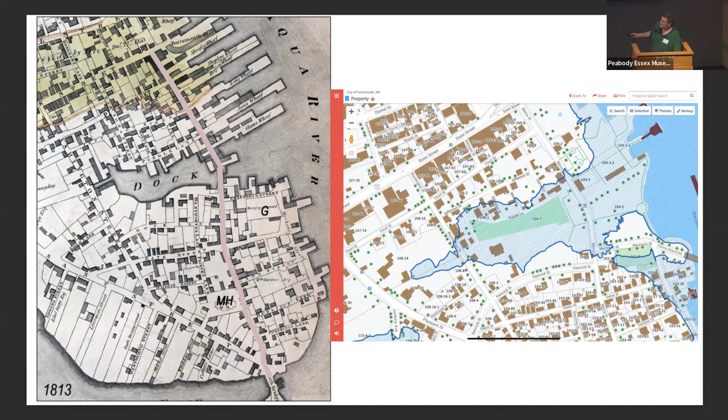The best evidence of that is the city's flood projections. This is the FEMA flood projections over the city of Portsmouth map. You can see all of the buildings along that low green area, which was the dock, is the projected flooding. And interestingly enough, because water has a memory, it's basically trying to connect back to what is now the South Mill Pond, which is what it did historically back in the 1600s.

So groundwater is a little bit less known issue, and a lot of research is going on with it. These are some projections out of the hydro predictions that came out at a conference just in June. You can see in our particular area there's a lot of major concern about what the water is going to look like, especially right here, which is where Puddle Dock used to be, and what groundwater is going to do being influenced by the Piscataqua River.

We've been seeing this in our basements for certainly the last 3 decades. As long as I've been at Strawberry Banke, we've talked to people who used to live in the buildings back in the 50s, and they remember a damp smell to the basements. So I think this has been an increasing problem for decades, actually.

And this is kind of what happens: the groundwater perks up from underneath the large field, and then the rains fall from the sky, and there's no perking. The water has no place to go. So we have this huge lake that forms.

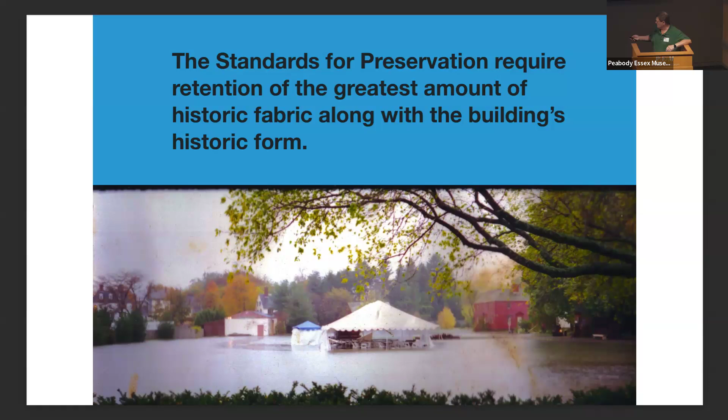My focus today is going to be on the Penhallow House. This is a 1758 structure that was actually moved to our campus in 1862. So we consider it our own, even though it was moved here. It's been there a long time.

Unfortunately, unbeknownst to them, they put it right on the creek that used to go from the Puddle Dock and lead to the South Mill Pond. So this building has been suffering from huge quantities of water and high relative humidity in the basement forever. We had to address how to take care of both the relative humidity and the issues associated with the standing water.

This just gives you a little background. This is the Penhallow House right here. Here's that 1813 map showing you the dock, and before, the water used to trickle right through and head back to the South Mill Pond. This is a modern map picture today of where the Penhallow House is. So this is some of the serious water we're dealing with.

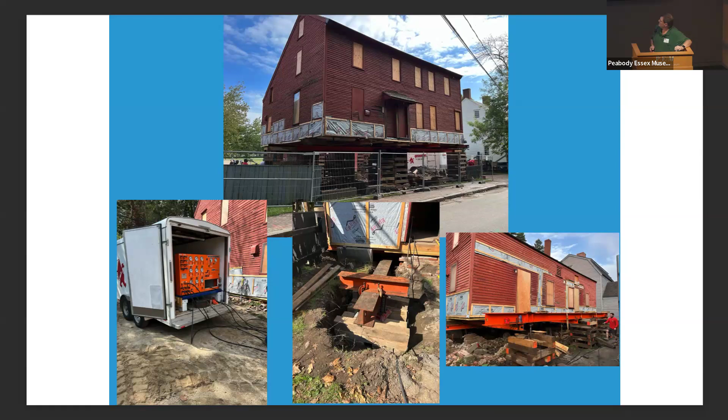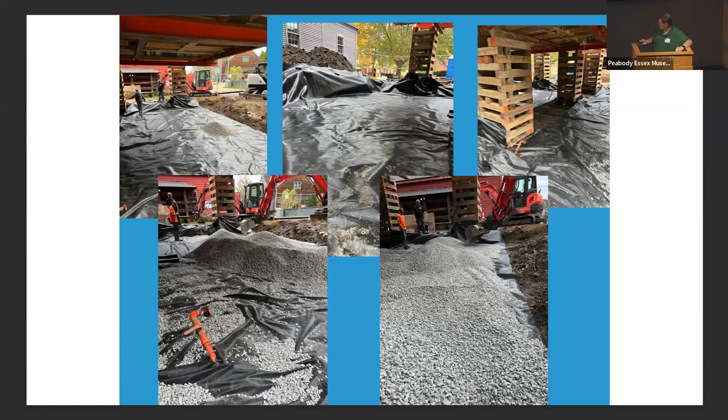These are some images showing you what we decided to do. We didn't want to change the context of the building in relationship to the streetscape — that's really central to what we're interpreting. So we decided to elevate the building, go underneath, and remove the existing foundation, putting in a very thick permeable membrane, which you can see in these images, covering it with eventually 3 to 3.5 feet of crushed rock against a new poured concrete foundation, which you can see in these images, both the forms going in and then the actual concrete that's been poured.

This allows us to create what's called a wet-proof basement. We're going to invite the water to come and go as it needs or wants to, with the idea that we have systems in place to get rid of the water when the Piscataqua River will take it. So our biggest challenge is that our drainage system connects to the Piscataqua River, and that's tidal.

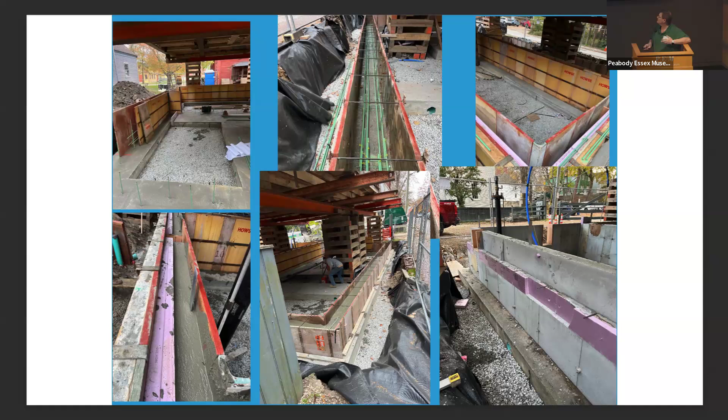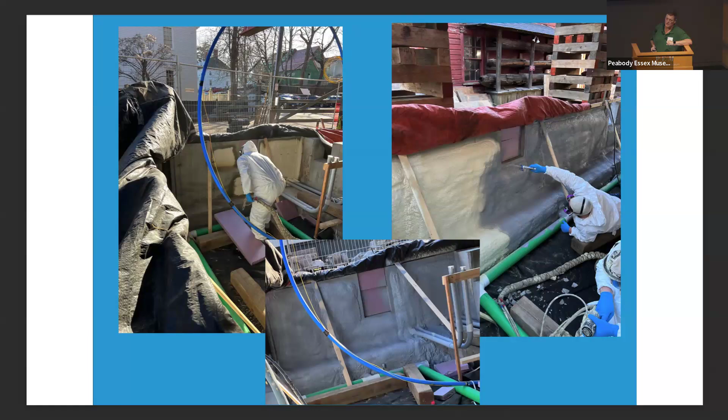It's an interesting process. These are images of the spray foam that we had to put onto the foundation, which is twofold: one, it's to help us with the humidity question that I brought up earlier, but also it has to be fire retardant because we're planning on putting residential apartments in half of the building. So we have to have a fire rating.

And this is the good news: that huge storm we had in January saw the highest recorded tide in the Piscataqua River ever. It filled up the basement above the crushed rock, as you can see, just as we had hoped. And then when that tide went out in 2.5 hours, it drained away. So this was our hope, that we would have enough space for that water to come and go, but not impact the undercarriage of the building.

We did put in some insurance, if you will. You can see these little pockets right here — there's actually 4 of them. Those are going to be flood vents. So if the water begins to creep up onto those joists or close to the joists, it's going to spill out behind the back of the house and go into some newly established rain gardens that I'll talk about.

And we also embedded a hard-piped sump pump in the center of the basement, which will go out on Washington Street at the front of the building. You can see it right there. And that's sort of a last-ditch effort. It'll be a battery-operated pump. If we need to pump it, we will, but that's hopefully never going to be needed.

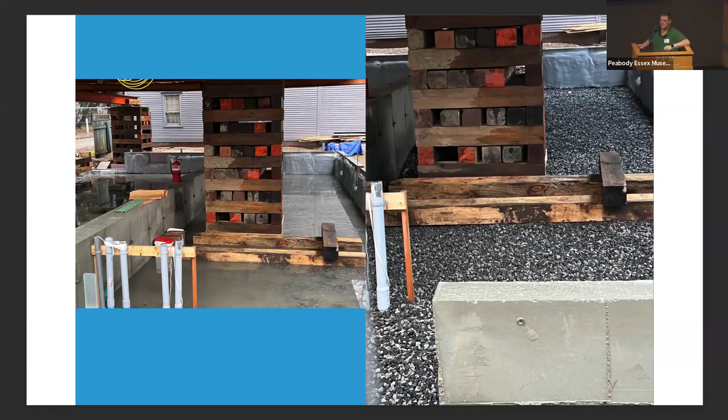Just to talk a little about the surface flooding, because this building is impacted by that as well.

In the spring, we're going to be implementing a mountable curb. Basically what's happening is the city stormwater is coming down both sides of Washington Street to this low point, and then it floods our property, which isn't something we should have to deal with. The city's our partner, they're going to help us with this, but we're going to put in a mountable curb, which will give us about 5 inches and cause the flooding to happen in the street as opposed to on our land. We're then going to be changing the elevation of our street, bringing it down 6 to 8 inches so that we have positive pitch away from the Walsh House, which is the historic house that's here, and Penhallow House.

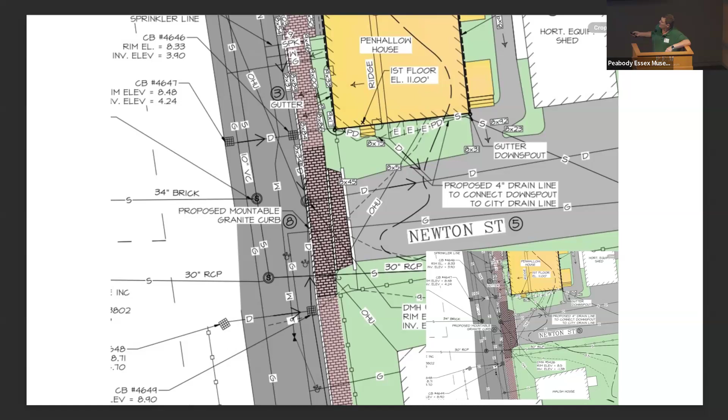That will go to some newly established water runoff areas and then bioretention areas both here and up on Whidden Place, because all the water comes down this way, and it used to come down this way. So we're going to break that water load in half. We're going to send half of it up to this area where there's an existing storm drain, and then we're going to send the other half to this newly created storm drain.

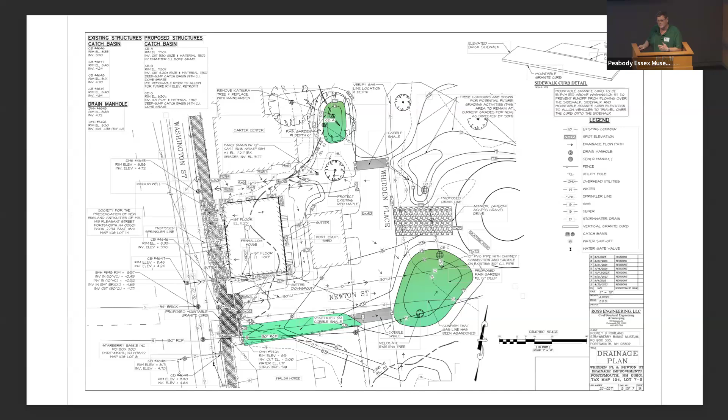And again, it's a waiting game. The water will stay there till the Piscataqua River tide goes out and the stormwater system begins to work again. So, that's my time. Thank you very much.

Oh, there they come. Nope, I see them, they're coming up.

Hi, I'm Julie Larry, and I'm an architectural historian, and I was formerly the Director of Advocacy for Greater Portland Landmarks, which is a regional nonprofit. While with Greater Portland Landmarks, we initiated a project to increase our understanding of the potential impact of increased flooding and storm surges on our region's historic resources, and to determine what strategies could be taken to prevent or mitigate those impacts.

In particular, our concerns are with two communities currently experiencing flooding impacts, Portland and South Portland. This is the Portland waterfront here. Portland is the arm on the top left of your screen, and South Portland is at the bottom. As you can see in this image, the highest projection scenarios, which are the bright yellow-green mapped by the Maine Geological Survey, are anticipated to significantly inundate large neighborhoods in both communities.

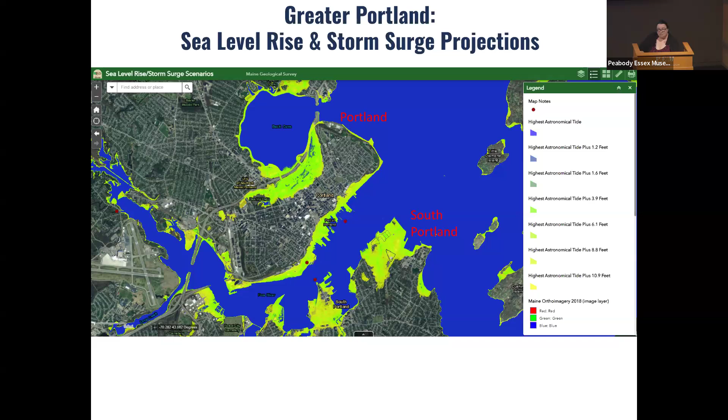The two selected neighborhoods are vulnerable because they are coastal neighborhoods, but they are also in large part at risk due to a history of fill projects for land development.

In recent years, Portland's neighborhood has been experiencing recurrent sunny day flooding, as well as significant flooding events like depicted here in this storm, which was December of 2012. That's a significant amount of flooding that was exacerbated in part because the infrastructure underneath with the rising water collapsed, and there were water main breaks, which exacerbated all of the problems.

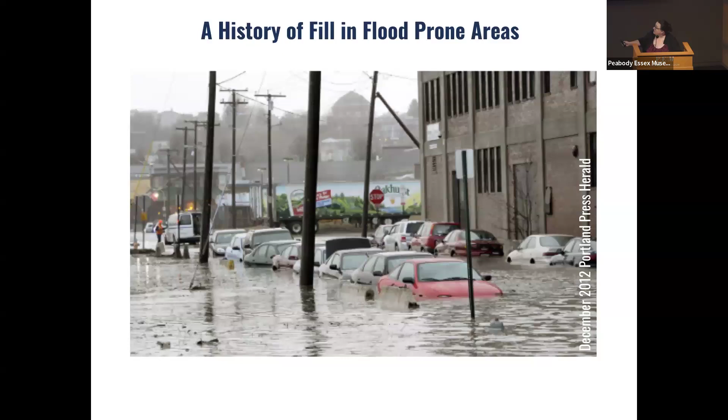So we at Landmarks set out to raise awareness in the region as to what could be lost due to the impacts of climate change, but also for our advocacy and education programming, we needed to focus our ongoing surveys on historic resources because we didn't know exactly what could be lost. We also wanted to engage in policy discussions on a broad level, but also help historic homeowners and property owners with what they could actually do and what they could design for, for those who don't have their own facilities personnel in their home.

So in 2018, we received a Historic Preservation Fund grant from the Maine Historic Preservation Commission to document historic resources in those two targeted neighborhoods. We used summer interns to complete the field work, and we had them record the usual historic features that architectural historians doing historic resource surveys go out and do. But we also worked with the two sustainability offices in each city to come up with a list of features they were interested in documenting, and we had our surveying field interns do that work.

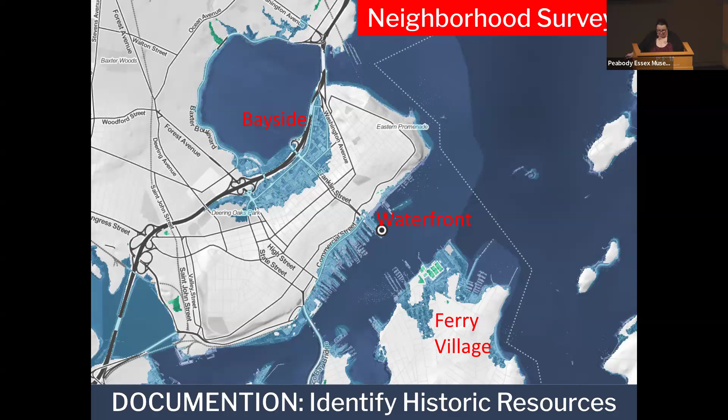Let me tell you a little bit about each neighborhood in more depth.

Bayside is a neighborhood with some of Portland's oldest housing stock, mainly in the Greek Revival style, as it was mostly untouched during a catastrophic fire in Portland in 1866 that left about 10,000 Portlanders homeless. It also contains some 20th century industrial properties like the Schlotterbeck and Foss building, which is on the National Register of Historic Places and was recently rehabbed using historic tax credits.

It also has some mid-20th century modern properties like the former Portland Motor Sales building, one of my favorite buildings in town, which is unfortunately a U-Haul storage building. But it's there, waiting for rehab. Unfortunately, Bayside was also a dumping ground for a lot of the fill that happened during the fire of 1866, and that helped propel some of those infill and landfill projects that happened in the 19th century.

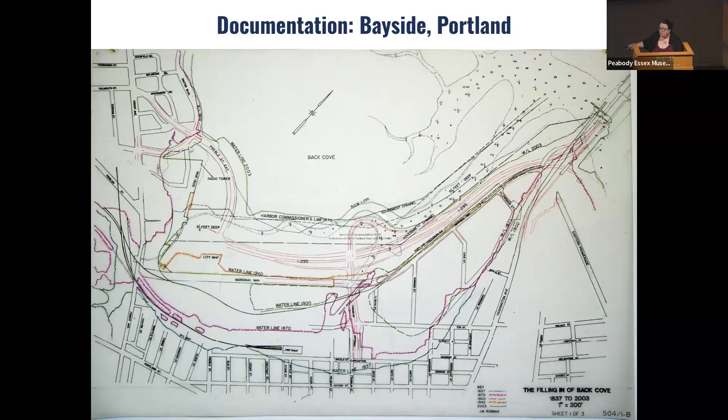The historic resources survey identified a significant number of historic dwellings and commercial buildings in the neighborhood. Each orange dot is a historic resource located within the predicted inundation areas, and each dot links to a supplemental survey form created by the Maine Historic Preservation Commission to document potential climate change vulnerability features.

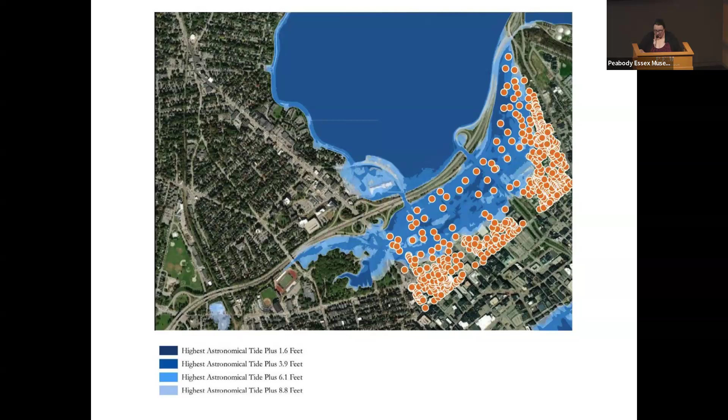Across the river in Ferry Village is one of the earliest settlement areas in South Portland, adjacent to a large area of the city that was filled initially for residential development. The residential development was later taken down, and fill projects were expanded for the Liberty shipyards during World War II. These lands were then redeveloped for fuel storage tanks associated with the Portland and Montreal pipeline.

Portland Harbor was a winter harbor for many decades for Canada. The World War II era fill and development unfortunately blocked off a natural stream known as Jerry's Brook that flowed through Ferry Village into the harbor.

The village has traditionally been a working class neighborhood, established in the mid-18th century. It's largely associated with the working waterfront and includes some higher style examples of Greek Revival, Gothic Revival, Italianate, and Second Empire, but is mostly comprised of vernacular structures.

What we learned during our survey is that many of the dwellings close to the former stream, or Jerry's Brook, are experiencing recurrent basement flooding during high tides, even on sunny days, as well as during significant rain events.

As in Bayside, the Ferry Village Historic Resources Survey identified a significant number of properties within the potential inundation area.

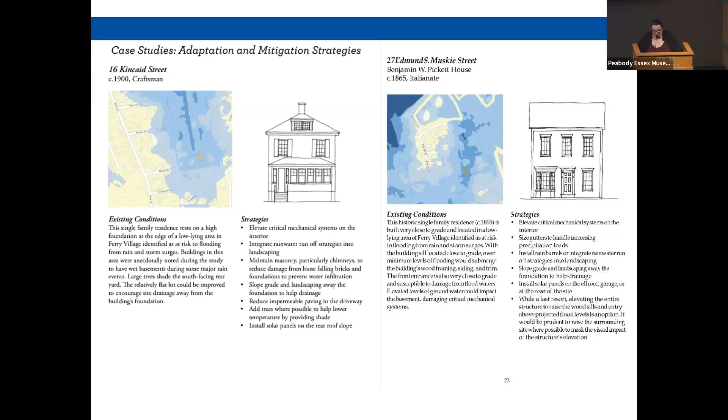These are some examples in the Portland area. As I mentioned, the survey work identified common vulnerabilities in both neighborhoods. We were able to look at that data, look at what the percentages were in each neighborhood, and come up with what the most likely vulnerabilities were and attach some potential strategies to them.

So the Property Owner's Guide outlines how an owner can first identify their own individual vulnerabilities for their property, and then suggests strategies for making improvements for the most common issues, like low or below-grade basement windows and openings that you see here.

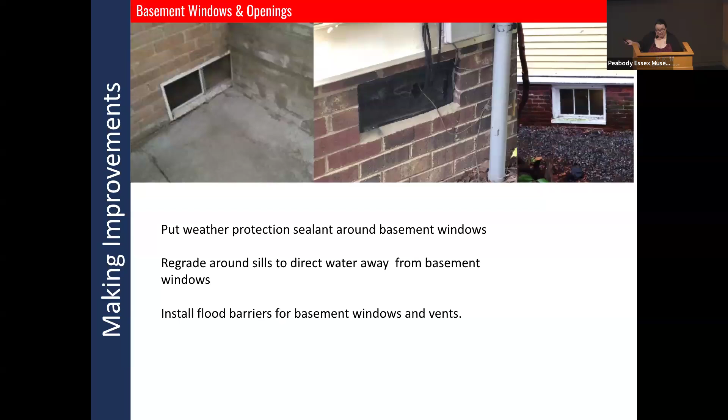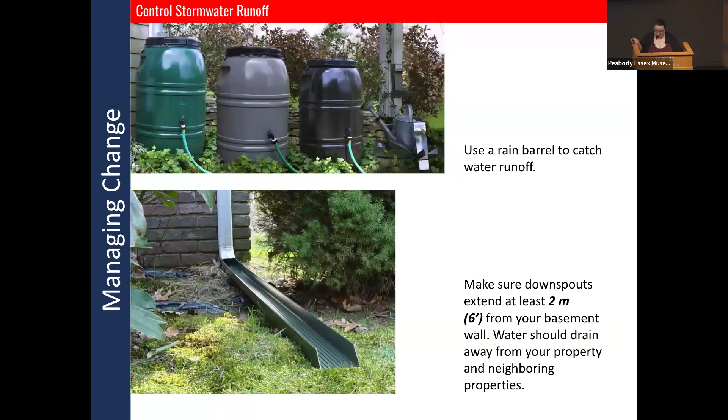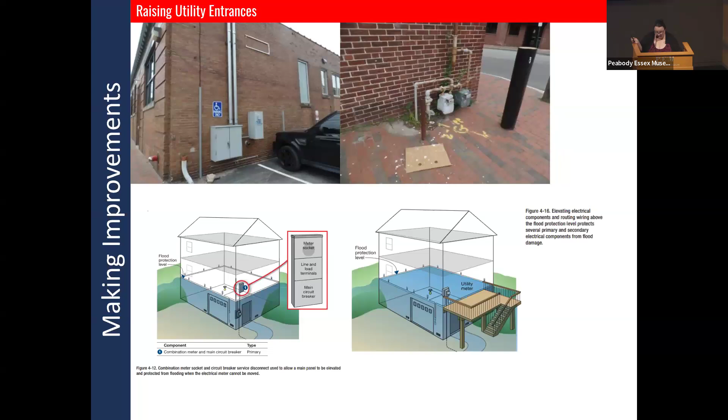We also cataloged things like negative site drainage and gave some strategies on how a property owner might be able to reverse that: how to control stormwater runoff, how to deal with flood-prone basements, and what you should be doing with your utilities and other features in your basement, how to potentially look at moving low utility entrances, and how, for our commercial properties in these areas, a potential property owner might deal with at-grade commercial entrances.

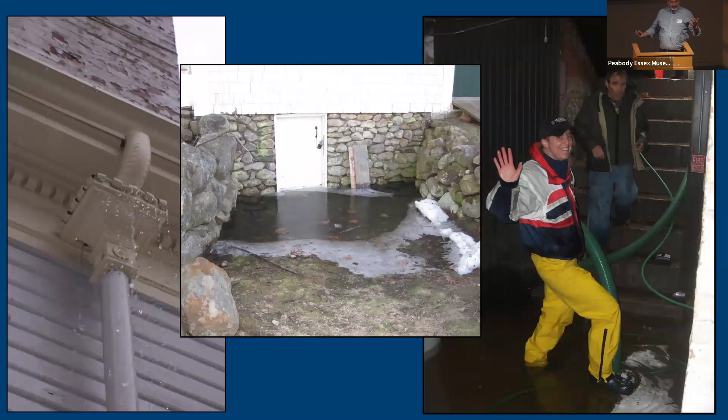I'm going to change gears a little bit and talk about rain and localized flooding. These are issues that really affect the properties I deal with. Inundation rains overwhelm our gutter systems or lead to basement flooding and all sorts of shenanigans, which leads to building damage, object damage, and mechanical system damage. It's something we think about constantly, and as we all know, it's raining a lot more these days.

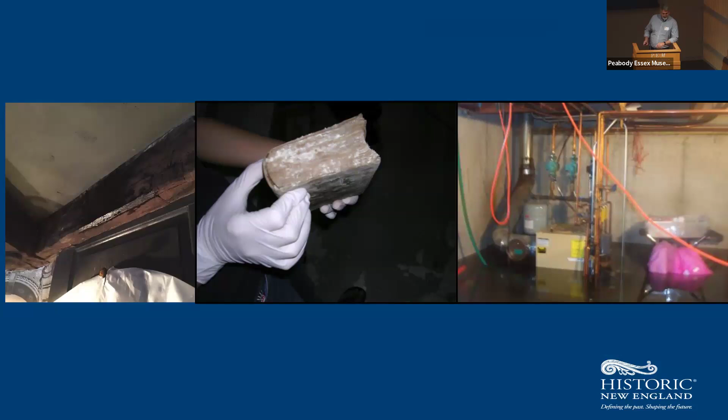So who am I and who do I represent? I represent Historic New England, a regional preservation organization. We have a lot of different program areas, but the one I'm involved in is homes, farms, and landscapes. We oversee 41 historic properties, which is 167 structures and 1,300 acres of land, from Rhode Island up to Mid-Coast Maine, so we're kind of regionally spread apart. My team, the property care team, is responsible for the preservation and maintenance of all this real estate, from brush clearing to garden restoration, from mechanical systems to roofing jobs.

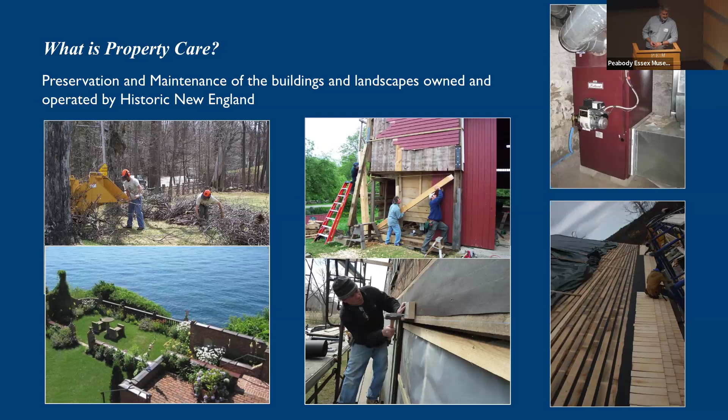In 2023, we adopted a climate action plan for Historic New England. Our Board of Trustees adopted this. We have some major goals, but the one we're focused on today is managing our properties to meet high preservation standards, while also recognizing we have to adapt to ensure resiliency in the face of weather extremes and sea level rise.

So if we're going to talk about that, we should give a little baseline. Anecdotally, we knew for a very long time that we were at risk for inundation rains and localized flooding. In fact, we think about it all the time, because every storm is just slamming us.

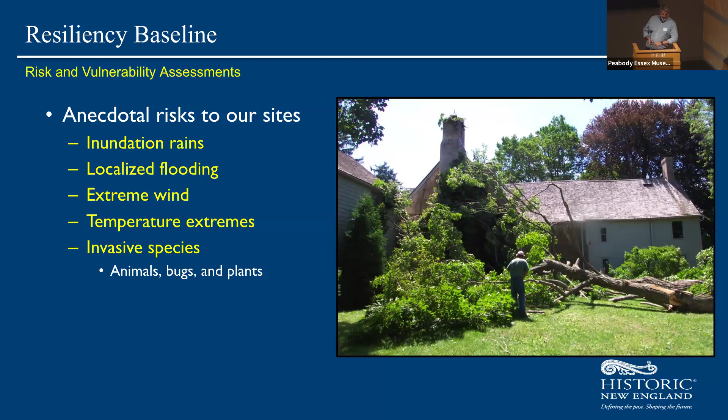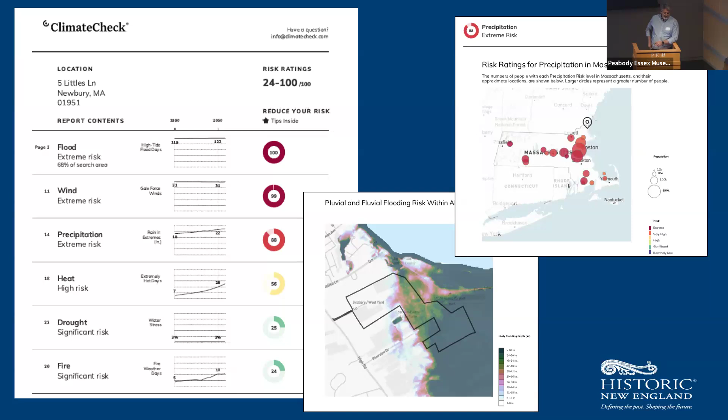But we didn't have a lot of data. So our sustainability coordinator, Joie, who's here - Joie, raise your hand - she did risk assessments for all of our properties, which we analyzed, and it wasn't surprising. The greatest risk for every one of these properties was wind and precipitation, and most windstorms come with rain. So it's windy rain plus regular rain, and those are our big risks.

But again, we're a big regional organization, so what exactly is happening on the ground? Joie has been helping us track and analyze actual storm event data. For every storm, we're tracking what the storm was, how it hit the different sites, what the weather was in our different zones, plus what was being reported as damage. Again, no surprise, we're very focused on wind and rain events.

So what are we doing about that? Well, we've been doing things for a very long time, over 3 decades of emergency preparedness and response. But really by 2006, 2007, we started responding to the events and trying to figure out how to mitigate them in the future. We didn't really associate it directly with climate change at the time, but that's what we were doing.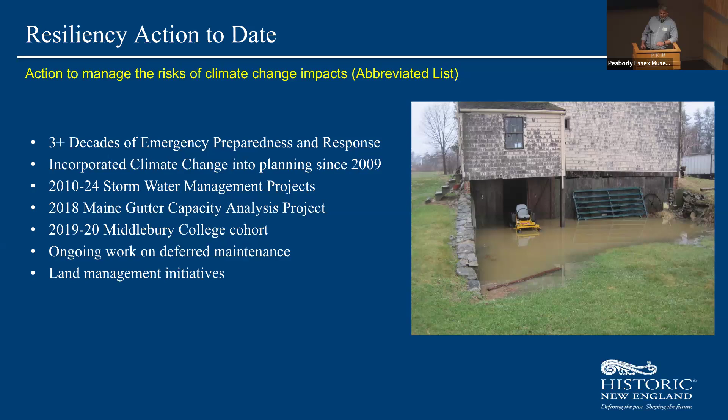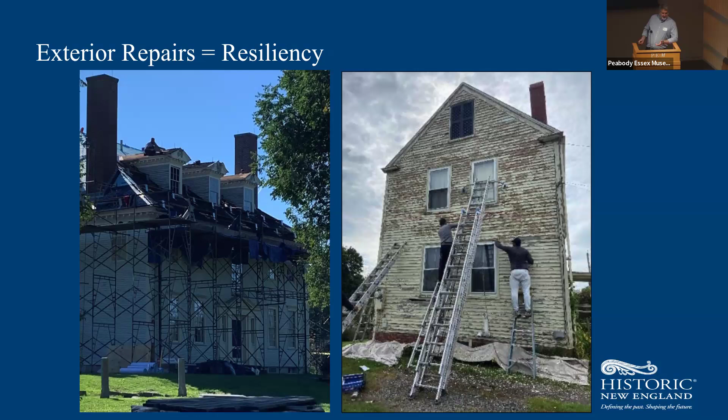The first thing I'll say is, don't forget, just keeping your buildings in good repair is a resiliency thing. Every grant I do is called exterior repairs and resiliency or something like that. But that's what we're doing - we're trying to keep the water out. That's what all those systems are for. It's our first line of defense for the buildings.

In 2018, we did a study, through the Maine Historic Preservation Office, where we analyzed our gutter capacity. We thought we were being proactive because we were like, let's look at and measure our gutters and how much water they move so that we can start planning for the future of climate change and how they're going to perform. Of course, we realized very quickly that none of our gutters could really perform in the inundation rates we were getting. In fact, this is one of my favorite images - look at the trough size on that historic gutter. You're carrying nothing with that.

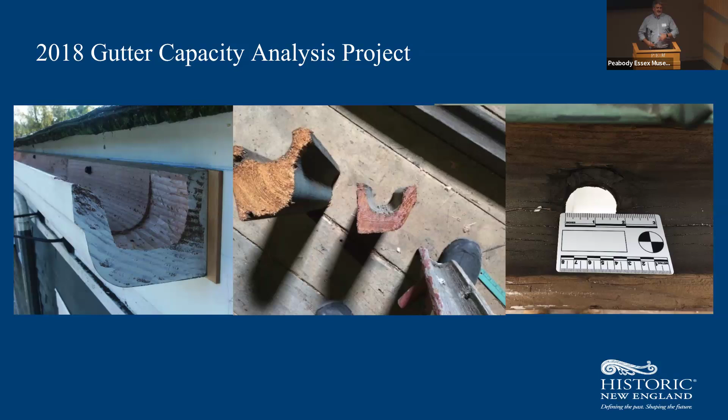And then what we especially realized was most of our gutters, the trough might have been big enough, but then the little outlet leading to the downspout was horribly small. That's why the water's pouring over the sides. It's not that it needs to be cleaned, it actually needs a bigger outlet, a bigger release valve.

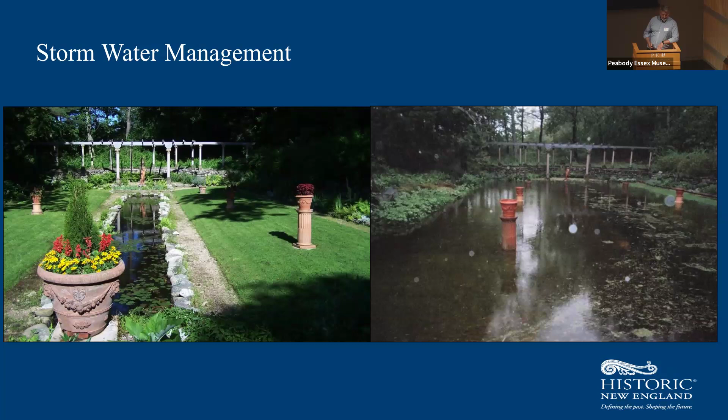For over a decade, we've been thinking about stormwater management on our sites, not just the gutters, but how water is performing on the sites. The approaches we developed 10, 12 years ago are still pretty effective. They're working well at our sites, and it's a holistic look - we're thinking about how all the water is interacting, all the stormwater once it hits the site, and implementing major site-wide projects, including drainage systems and moving water. Finally, since we started that before we realized the gutters were undersized, we tied the gutter work into the drainage work, all just to get water away.

But you can't always do these gigantic, holistic, site-wide projects. They're very expensive and take a long time to plan and implement. There's archaeology involved, all of those things.

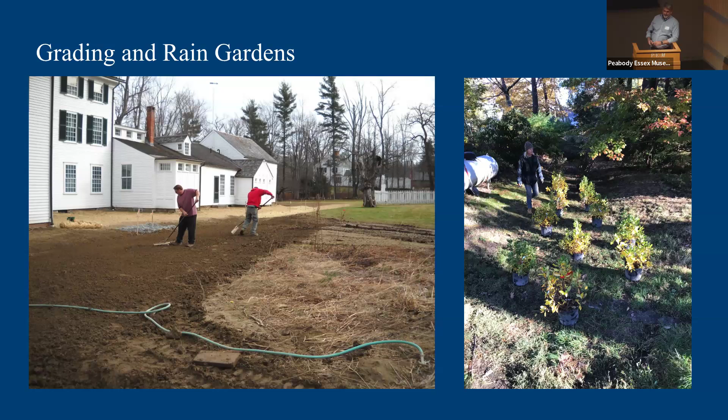So we don't want to forget some of the other things, like just grading away from the buildings, which is pretty effective. Let's keep the water from pooling next to your foundation. We're starting to explore rain gardens as a potential place for our water to go.

And of course, the small efforts count. If you can't even get to those things, just make sure your gutters are clean, which is a challenge. And then, this hot mess.

Someday we're going to get a drainage system there, but at least they're trying, right? We're trying to get the water as far away from the buildings as possible.

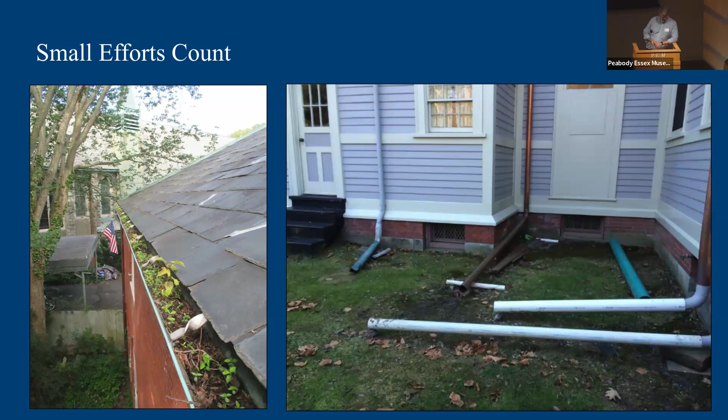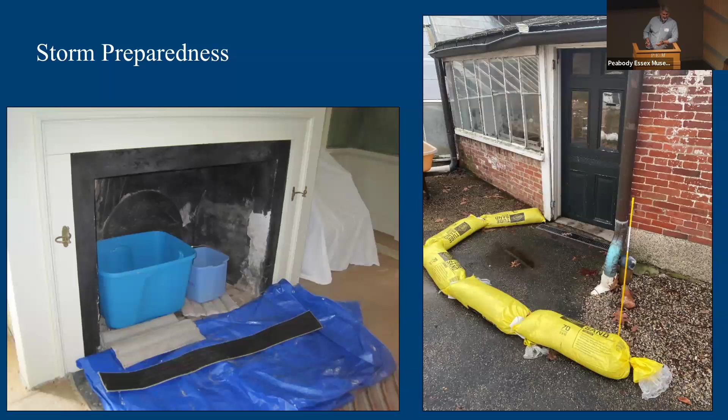And then in our basements, deploying the sump pumps to keep the water out once it gets in the basement, and dehumidifiers to dry out the space. And then every storm, we're deploying where we know water's going to get in, despite our efforts. So just keeping that in mind.

Of course, anything below grade is going to require archaeology. We're a preservation organization, so we talk about in-kind replacement all the time.

Well, replacing our gutters in-kind isn't effective anymore. We really need to be thinking about upsizing the gutters and downspouts. Site drainage is major—whether you do the big project or that small grading project, it's really important.

And everything we do is trying to be gravity-based so that we're not dependent on power for the pumps to get things away. So that's our first target.